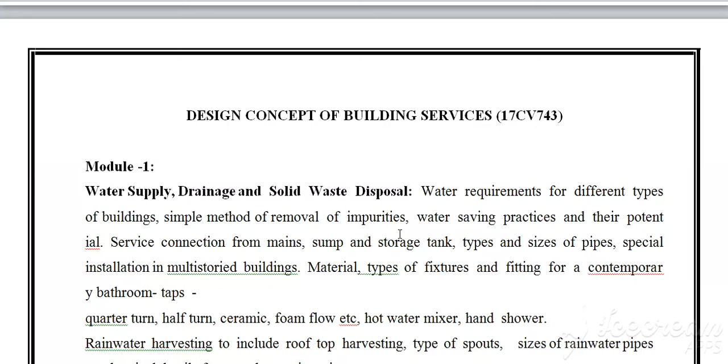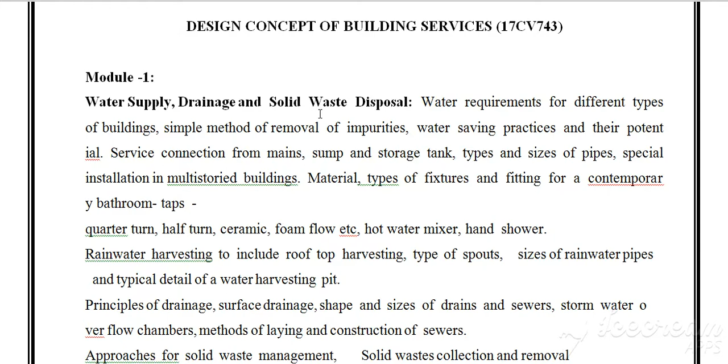Let us see the syllabus. In module 1, water supply, drainage and solid waste disposal. See, it is very important in the building.

And in module 2 we are going to study heat, ventilation and air conditioning, in short form we call HVAC.

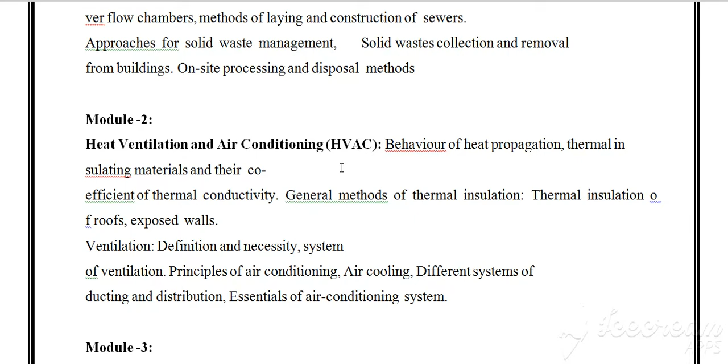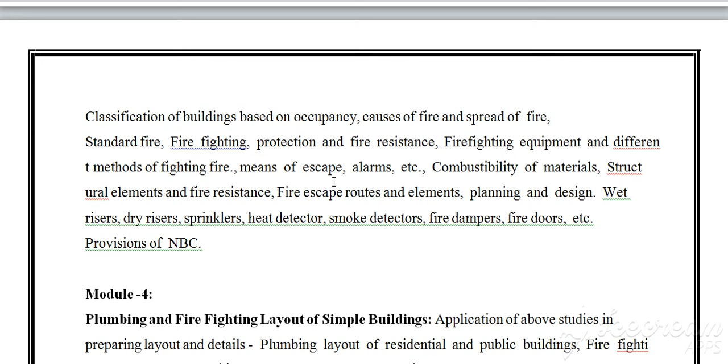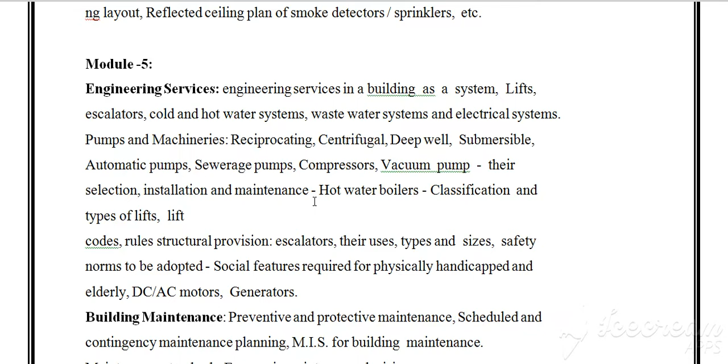And in module 3, electrical and firefighting services. And in module 4, plumbing and firefighting layout of simple buildings. And in module 5, engineering services, building maintenance. This is the syllabus.

Now tell me, what is building services? Building services are the systems installed in buildings to make them comfortable, functional, efficient and safe. Building services are what make a building come to life. It is correct, no? Without convenient services, we can't live in the building. That means we are not comfortable in the building.

Building services engineers are responsible for the design, installation, operation and monitoring of the mechanical, electrical and public health systems required for the safe, comfortable and environmentally friendly operation of modern buildings. The term building services engineering is widely used in the United Kingdom, Ireland, Canada and Australia.

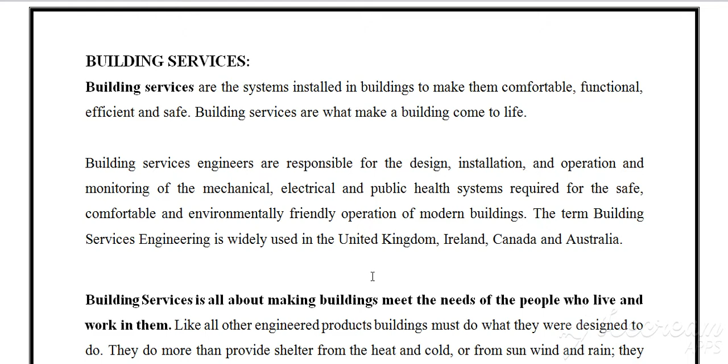Building services is all about making buildings meet the needs of the people who live and work in them. Like all other engineered products, buildings must do what they were designed to do. They do more than provide shelter from the heat and cold or from sun, wind and rain. They must also provide a safe and healthy environment in which people can live, work and achieve.

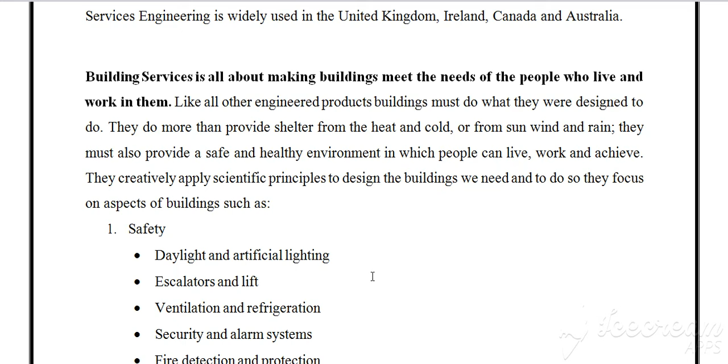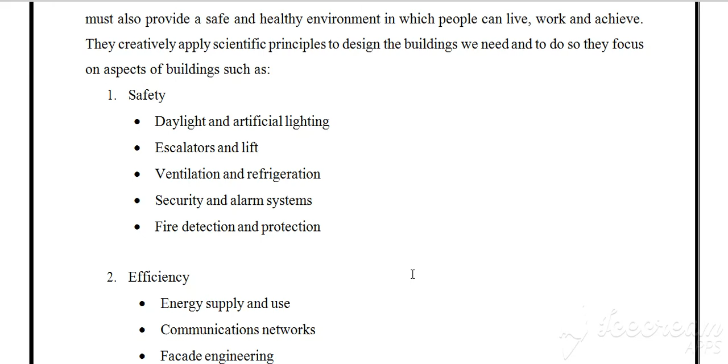They creatively apply scientific principles to design the buildings we need, and to do so they focus on aspects of buildings such as safety, daylight and artificial lighting, escalators and lifts, ventilation and refrigeration, security and alarm systems, fire detection and protection. In efficiency: energy supply and use, communications networks, facade engineering. And in comfort: heating and ventilating, water drainage and...